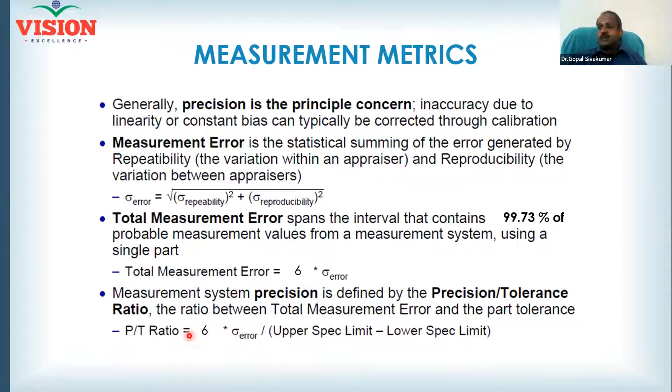This is called precision error. See here, numerator, this is called precision error. The denominator, tolerance, USL minus LSL. Now you have the ratio, precision tolerance ratio. What is the name of this ratio? Gauge R&R. Very good. So this gauge R&R should be less than 10% to consider your measurement system as good.

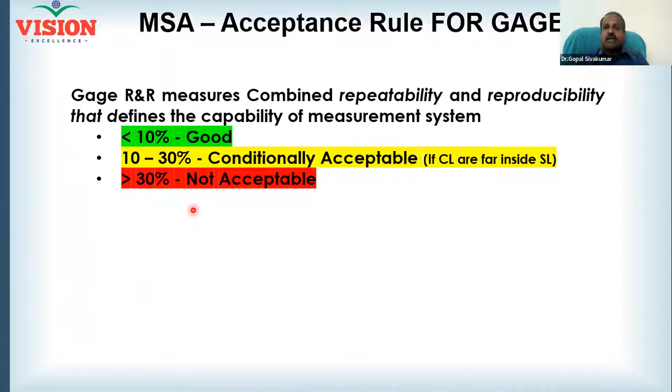10 to 30%, conditionally good. More than 30%, unacceptable. Your data is garbage. Garbage in, garbage out. Whenever you are, yes, conditionally acceptable means?

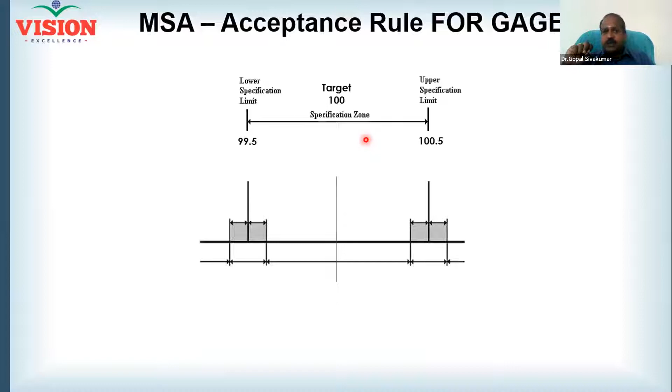0.1 mm can be error. If you have 0.1 mm error, 90% of the time you are safe. But 10% of the time you are under risk. That risk area is marked here. Can you see the gray area? When you produce here, you will commit type 1 error or type 2 error.

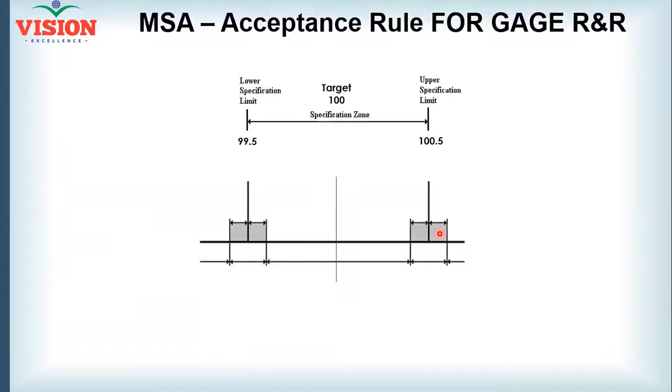When you produce here also, when you produce here, is the product good or bad? Bad, because it is out of spec. But because of the equipment error, your quality inspector will bring it here. Possible or not? Error can be plus, error can be minus. I can give you extra 5 marks, I can also reduce 5 marks, right? So error can be plus or minus.

So when you produce here, type 2 error will happen. When you produce here, type 1 error will happen. Why are these errors happening? Because you are producing in this manner. Look here, you are producing everywhere. If you are producing everywhere, you must strictly follow the industry standard.

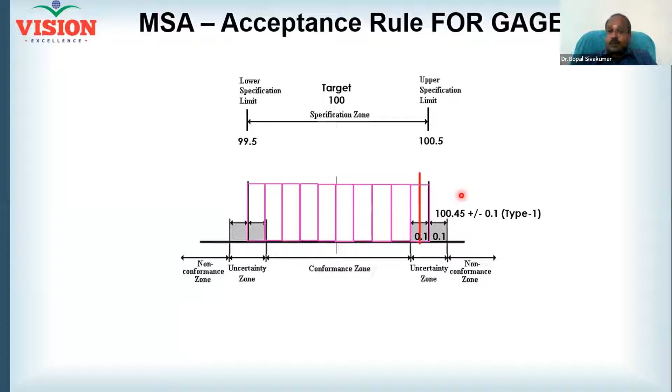Gauge R&R should be less than 10%. For you, the second condition is not applicable. You are not a world-class manufacturer. You are an ordinary manufacturer, an ordinary service provider, because you produce occupying all the tolerance. You produce occupying all the tolerance. But you are a matured company. All your people are skilled enough, so they keep on improving the process.

If they keep on improving the process, now you are able to produce in this manner. Do you understand where you are producing? Now you are slowly becoming world class. I will call you real world class if you produce everything around the center. But now you are close to world class. You are producing in this manner.

Can you see the control limit falling well inside the specification limit? Yes. If you can see your control limit falling well inside the specification limit, this 10% error does not have a chance to affect your product. Am I correct or not? Yes, this 10% error does not have a chance to affect your product because you are not coming into the risky zone at all.

This zone is called the uncertainty zone. It is like the India-Pakistan border. If you go to the border, there is very, very less chance you can come back, isn't it? So that's why we always avoid these border areas. It is well protected. Same way, you should also protect your risky zone.

If you clearly know your control limits are well inside, then you can consider using your measuring equipment even with a gauge R&R of 10 to 30%. Do all of you now understand the meaning of conditionally accepted? Yes sir. You can't understand this anywhere outside. If you have understood this, you are definitely on top of the experts in the market.

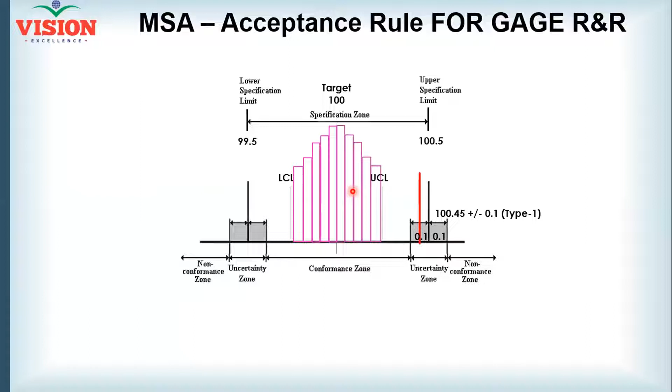Sir, conditional means it is not that we are expecting for every product. According to the company norms, we are expecting it temporarily.

That we can say. See, some companies take advantage of the statement 'conditionally acceptable.' Conditionally acceptable means my project champion is saying okay, you work with this - but these are all purely internal, there is no technical logic behind it. The technical logic I have explained. Sometimes measuring equipment is too costly. Do you think your company will immediately replace the measuring equipment? No, it is going to cost the company 45 lakhs. They'll say, no, you continue with this. See, those are not the real meaning of conditionally acceptable.

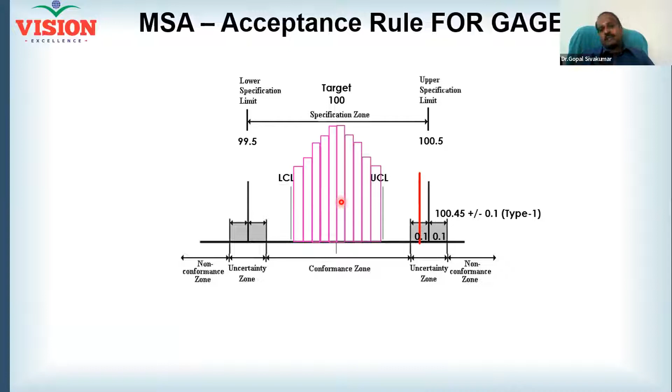Strictly speaking, statistically speaking, when the error is 10 to 30% and the control limits are well inside, even 30% error should not affect your decision. Then only it is conditionally acceptable. Only a pure statistician can understand this definition, right? Otherwise, sometimes we also say, if the company cannot afford better, accept it conditionally, but that's not the real justification. In any case, more than 30% is unacceptable. Hope it is clear to all of you.

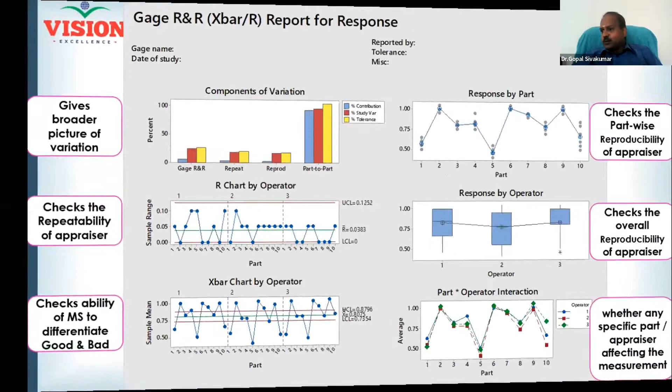Now, this report is generated by Minitab in a few seconds. But if there is a problem and you want to understand the root of the problem, you should be very good at reading all the graphs. How many graphs are you seeing here? No doubt, sir, part-to-part variation is more than 100%, isn't it, sir?

Yeah, correct. It is simply because you are working with the standard deviation - plus deviation, minus deviation, and also standard deviation. So that is why total variation can be more than 100%. If you don't want it to go beyond 100%, you must work with variance, not standard deviation. There are two approaches available. When you work with standard deviation, this won't tally. You can see repeatability error plus reproducibility error - if you sum them up, it is not equal to 27, isn't it? If you want to get 27, you square the 20, square the 18, add them, take the square root, then 27 will come.

So that is the problem with standard deviation. But we are studying everything with standard deviation, that is why I have taken the report using standard deviation. You can take the report with variance also - there, 100% will come. Total variation will become 100, and if you sum up all these things, that will tally, but not with standard deviation.

If you know how to read the graphs, you will be able to fix all the problems and arrive at a solution to bring down the gauge R&R. Now tell me, how many of you are very good at reading the graph? You might have used all these graphs, am I right? Shall we go through the graphs?

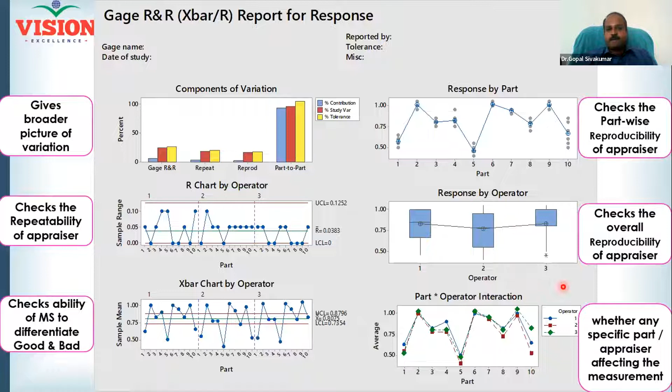Yes, shall we go through? Yes, sir. First graph, sir.

Bar graph. Now there are 3 colors: blue, red, and yellow.

The blue is for percentage contribution. When you don't know tolerance, you should use blue. What is tolerance? USL, LSL. If you know the tolerance, you must come to either red or yellow.

Now red, and there is red as well as yellow. Let me correct my statement. So there are three graphs: blue, red and yellow. Blue is with the variance, red and yellow are with the standard deviation.

So what are we working with? Standard deviation. So far as applicable is red and yellow. Within red and yellow, when USL, LSL are known, you must use yellow. If it is not known, you must use red.

Look here, the name of red is study variation. Name of yellow is tolerance. Use yellow only when USL, LSL are known. Most of the time you will be knowing the USL, LSL. Am I correct? Yes, sir.

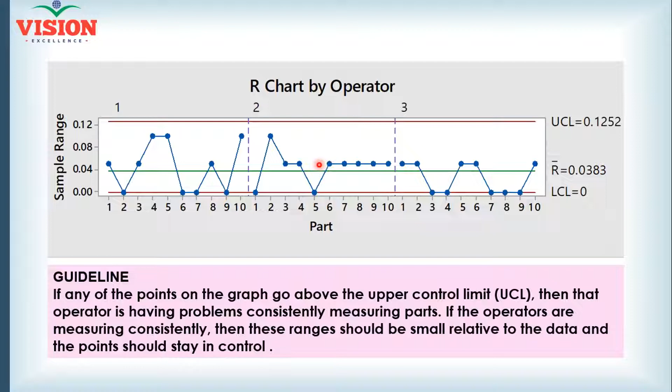2 is also okay, isn't it? But can you look at the reading of 2 here? Perfect straight line, yes sir. If you see an ECG graph becoming a perfect straight line, what does it mean? Dead, structure is over, right? So which is abnormal? If you see up and down, that is normal distribution.

You remember I told you to select 5 parts left side, 5 parts right side, am I right? But look at operator 2, he is placing everything on the upper side only. You still accept him? Yes sir, in my opinion 2 is more dangerous than number 1.

Am I correct or not? Yes sir, though his readings are too close to the center line, his readings don't resemble normality. That means he is biased for some reason. You may have to bring it down. So this is how you need to read, and make sure your reading also exhibits normality.

If your reading also exhibits normality, your reading should go up and down, isn't it? If the readings are going up and down, the person is normal, the health is normal. If it is only giving you the peak, it is abnormal, doctor's attention is immediately required. If it is a flat line, then the chapter is closed, right? So you have to be very careful with the signals you receive from the control chart.

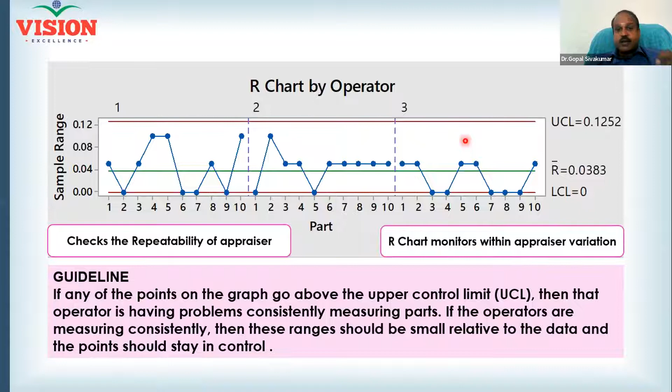And this is R chart. Now R chart helps you to control the repeatability error of the appraiser, am I right? Each single point is a range, am I right or not? If the range is under control, the repeatability error for the particular appraiser is under control, am I right or not? Yes sir.

For example, operator 1, 4th part, he committed the repeatability error too high. 5th part also he committed high. 10th part also he committed high. And operator 2 also, for part number 2, he committed more repeatability error. Do you understand? Operator wise, part wise, we are able to visualize the repeatability error. How many of you understand? All of you.

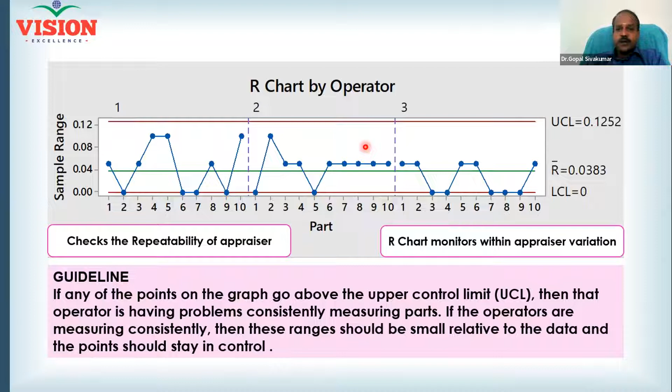Okay, sir. Understand. Yes, sir.

Now the next chart, X bar chart. This will help you visualize the reproducibility error as well as check the ability of the measurement system to categorize good and bad parts. I told you, when I give you 10 test papers, 7 should have a pass mark, 3 should have a fail mark. Now you are actually correcting the paper. How many test papers should actually pass? 7 should pass, 3 must fail.

Now, who selected the 10 parts in your Gage R&R study? The project leader, am I right? Or is it you who is conducting the gauge study? When you select the 10 parts, I told you to purposely mix in some bad parts. Am I right or not? Yes, sir.

If you mix 50% bad parts and the remaining all good, you should get all those 50% points outside the control limit. If that is not happening, please understand you are passing even a failed candidate. You mixed 50% bad parts, so bad parts should appear outside the control limit. If that is not happening, that shows the inability of your measurement system to categorize between good and bad.

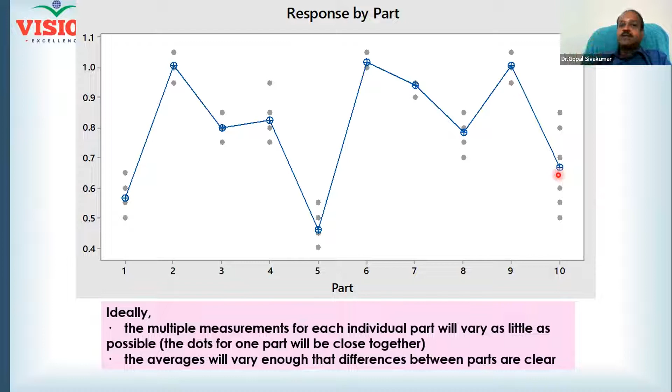All right, now the box plot. Box plot will help you control or understand the reproducibility. If there are 3 appraisers, and my average, your average, and the third person's average are all the same, you will see these averages on a perfect horizontal line. Am I right? See, this crossbar is the average. Since the averages are not on a perfect flat horizontal line, there is a reproducibility error.

Who is pulling down the average? Operator 2. Operator 2 is not aligning with 1 and 3. Operator 2's average is below the average of 1 and 3. Now another question: is operator 2 correct, or are 1 and 3 correct? 1 and 3 are correct. If 2 were correct, 1 and 3 should align with 2. If 2 is wrong, 2 must align with 1 and 3.

This also you can understand by carefully designing your Gage R&R study. If you select the 10 parts in such a way that mean equals median - do you understand one property of normal distribution is mean equal to median equal to mode? Am I correct or not? Yes. If you select the parts such that mean is equal to median, for example 5.4, 5.5, 5.6, what is the mean?

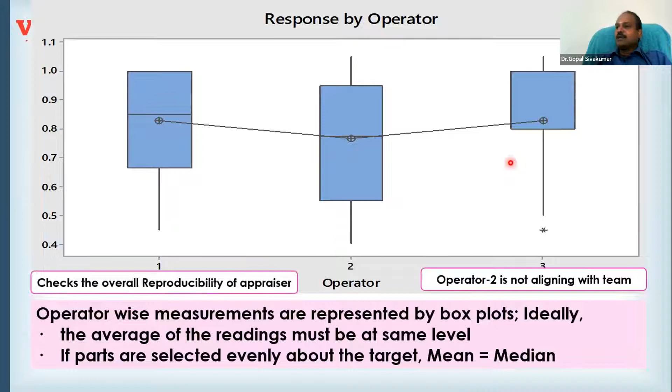And now this is called the interaction plot. It is nothing but your third graph. What is the third graph you have seen?

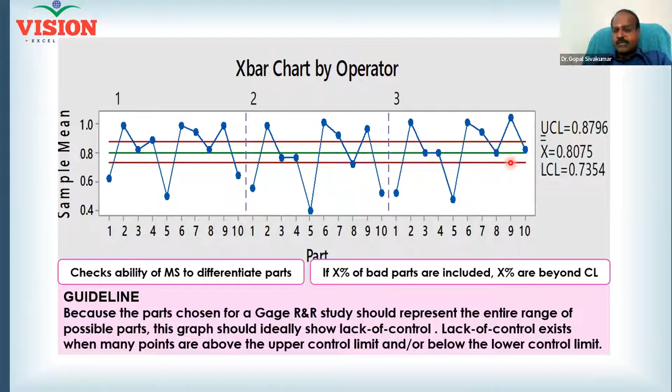What is the third graph you have seen? X bar chart, 3 X bar charts you have. If you overlap all the X bar charts one over the other, you will get something called an interaction plot. 1, 2, and 3 all are overlapped with each other.

If there is a perfect overlapping, reproducibility is at its best. Now, if it is not overlapping, at least they should be parallel to each other, not overlapping and not parallel.

Now, who is responsible? Look at the one who is crossing the line and disturbing the parallelity. There are 3 people, right? Look at the one who is not parallel and who is crossing the other one's line, and that one must be corrected.

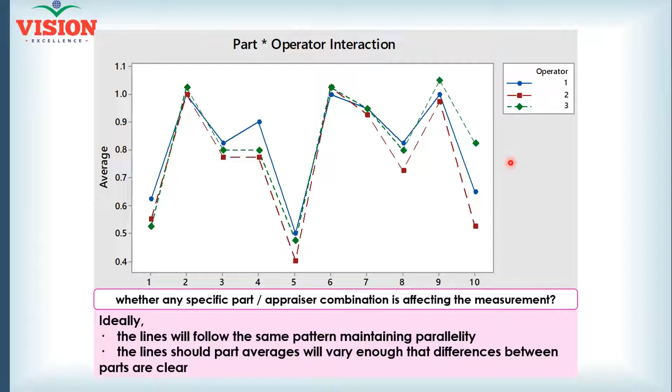Do you all understand how to read the graph? Yes sir. Here, from part 4 to 5, all are coming down, isn't it? All are coming down. And from 5 to 6, all are going up.

But you can see the green crossing with the blue, isn't it? And red also slightly crossing. So when there is an intersection of these lines, it means there is an interaction.

Their behavior is slightly abnormal, becoming abnormal, particularly while measuring part number 6. Up to 5, all the 3 behaved properly. That is why they are coming parallel.

Now something went wrong. I do not know whether the product is difficult to handle or the measuring equipment is difficult to handle. I do not know, but something wrong is happening. That is the reason for interaction, and that is the reason for intersection. And here the intersection is so strong by the blue color person.

Can you understand? So something like that you need to read and understand the situation. Particularly, you will be able to understand the graph very well if you have designed the study properly.

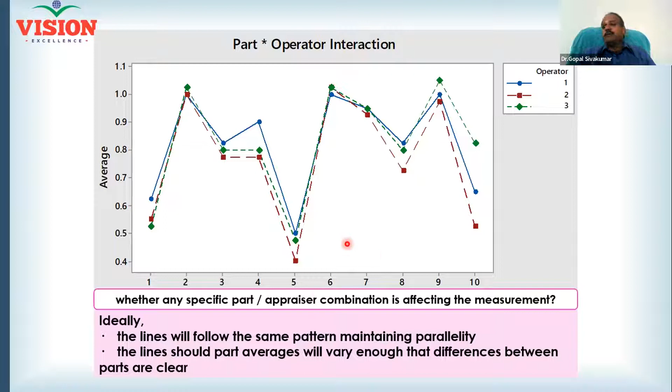This is how all of you can conduct the Gage R&R study and make your data worthy for analysis. And that's it from me.

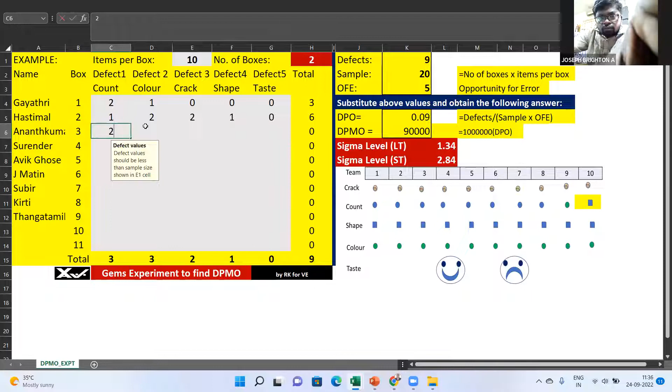Count, is there any defects? Sir, 3. Okay, I will take it as 2. Color? 1, 3. Someone is fast, please tell me. Crack? 2. And then shape? 1. Taste is 0, I'll put.

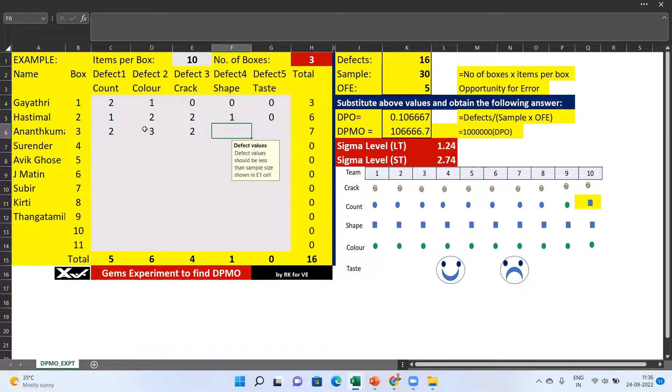Right, see here, 3 boxes are open, so it is 30. 30 into 5 is 150 in the denominator, 17 in the numerator. And that defects per opportunity is 0.113, per million it is 1,13,000, and sigma level is 1. Please note the difference between the two will always be 1.5. Now I'll just copy it.

See here, total defects found out have to be 69. You can do this calculation later on, all you need to do is check it yourself. Total is tallied here, column wise and row wise. And then sample is 70, 7 into 10 is 70. Opportunity for error is 5. 70 into 5 is 350. 69 by 350 is 0.197143.

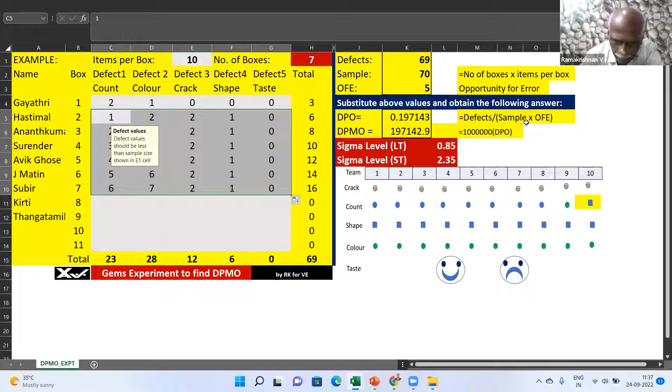This template I'm going to share with you. You can play it at leisure time in your college with your professor, probably she can arrange for this game, and then you can test it: what is the sigma level, short term and long term. Please note, what should be the sigma level for a good performance?

What is the course name? What is the course you are doing? Six Sigma. So what is the best performance? 99.99, Six Sigma. Six Sigma performance is the best performance. Yes or no? Yes, sir.

Now you are getting sigma level as 0.8, 2.35, very low. You should get sigma as 6. Yes or no? Sigma level 6 sigma we should get. So this is doing well or not doing well?

This is doing well or not doing well as per this? Not. No. But Gems is really doing well in the market, monopoly, because we have made a mistake here. RK has made a mistake. RK has made 2 mistakes.

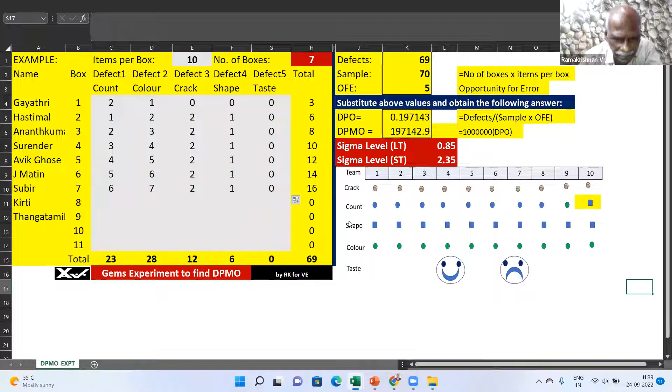Number 1, he has not taken the right sample. He should not have discussed this with you; he should have taken children, because it is meant for children. That's defect number 1, fault number 1. Understood? Yes or no? Fault number 2 RK made was that all the opportunities for error are not at all relevant for children. What is relevant for children is only taste. Therefore, if I put 0 here everywhere, then it is a very good process.

Please see here, and then you can see here.

So infinity, sigma level is very good, right? Even if I put 1 here, it will be 4.26. It is good. Therefore, you will have to do a sample study very carefully.

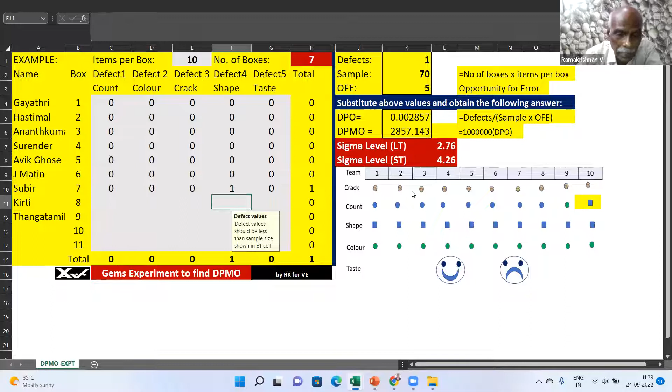Understood? I'll stop sharing here. Now I have taught you what is defects. What is defective means if all the specifications are not met, then it is called defective and it is to be rejected. A defective is to be rejected. A defect item may not be rejected. Understood?

Now I will take you to how to calculate defects, defectives, and then CP/CPK. CP/CPK is for capability analysis, and then I'll just take you to it. Another 20 minutes is there, right?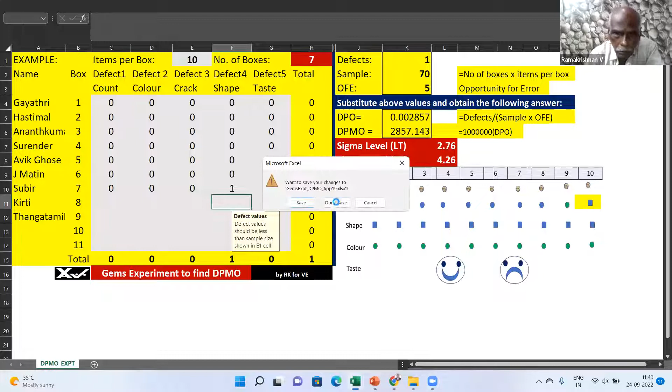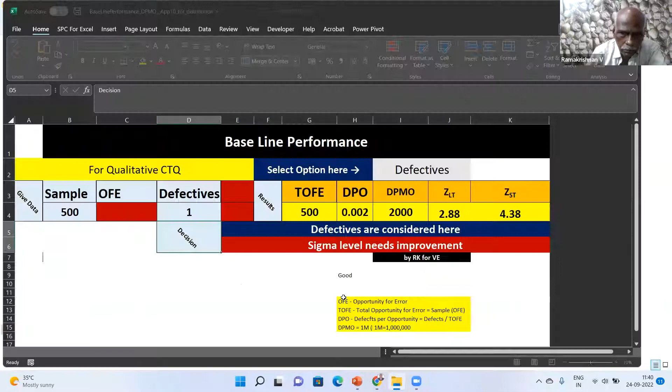See, are you able to see this? Yes, sir, this also I'm going to share with you. This template will be given to you. Please note, defects or defectives, you have to select here.

First, we'll select defectives. Defective means how many of them are rejected, that is what it means. So I have taken 500 samples. Opportunity for error is only 1. Either you reject it or accept it. That's all. Therefore, opportunity for error is always 1 for defectives.

Therefore, it is not giving an opportunity for you to feed in any value. If it is defects, this will open up for you to feed in data.

Now, suppose in 500 samples, I make it as 3 defectives. Then it is giving you short-term sigma level and long-term sigma level. DPMO is known. Total opportunity for error is 500, because 500 into 1 is 500. Defects is 3. 3 by 500 is 0.006. Multiplied by 1 million, you get 6,000. And short-term sigma level and long-term sigma level are obtained from this. Now, defectives are considered here.

Sigma level needs improvement. How much, up to 6, right? If you get 6 sigma level, then you are best.

Please note here, this is defects. This is called ZST. This is called ZLT. That means defects will increase over a longer period. That is why ZLT is low. ZLT is 1.5 less than ZST. So depending upon the green level line, the defects are diminished or increased where it is.

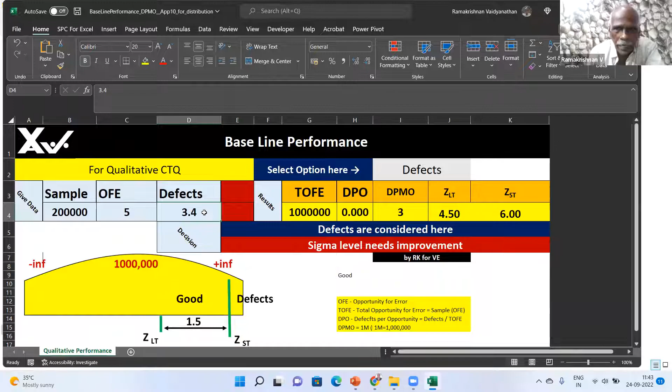Now, yes, sir, I'll just share it immediately after finishing the teaching of CP and CPK. Right? CP and CPK, there are 2 ratios which you should know.

How it is calculated, I don't have the PPT because I did not have time to select that PPT. But anyway, the PPT that I have at present, with that I will teach you. You will be able to understand that.

Oh God, oh God, oh God, oh God, oh God.

Is it CP-CPK calculation is there? Yes.

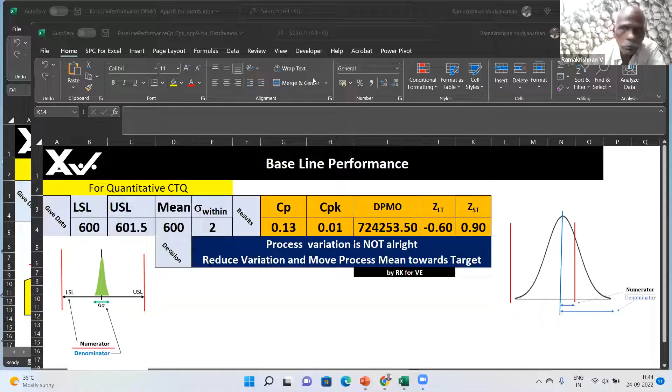I don't know how to adjust this. Yes, see here, these 2 red lines are there, no? Are you able to see this? Yes sir, see my this plus symbol. And what are they? Upper specification limit, lower specification limit, sir. Given by whom? Customer, that's all. And that is in the numerator, that is given in the numerator. And what is this green area?

Accepted, that is your process. Okay, that is your process. What are the process limits? 6 sigma limits are there. Yes or no? Yes, sir. So what is the process giving? What is your requirement? Now this is in the denominator. And the numerator by denominator is called CP. Right? Understood?

Here CP is different, yes or no? Is this a good performance? This one, right hand side. Right hand side is not a good performance. Here it is a good performance. Yes or no? Yes sir. How to calculate the CP and CPK?

CPK means, suppose this green area - I'm sorry, I'm not able to do this thing, otherwise I'll show it in the PPT. This green area, if it is shifted towards the right and close to the red line, is it a good process? No, sir. Even though this CP is very good, this process is not very good. That is given by this CPK. What is this CPK? CPK is the difference between the process specification capability limit and the mean of the process.

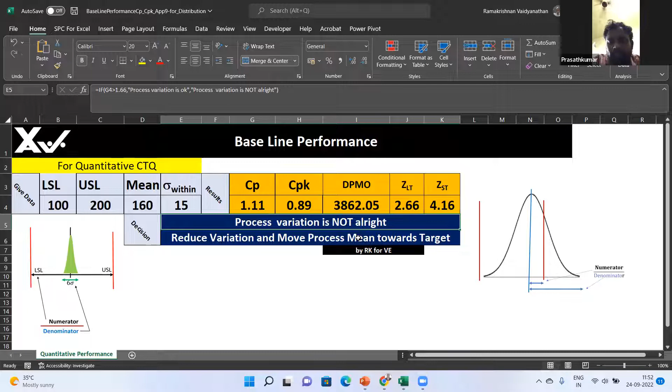Now with this template also I'm going to share it with you. You can use it and think. And then I will take you to a PPT and take you through more class. Now I'll have to stop sharing. How do I stop sharing?

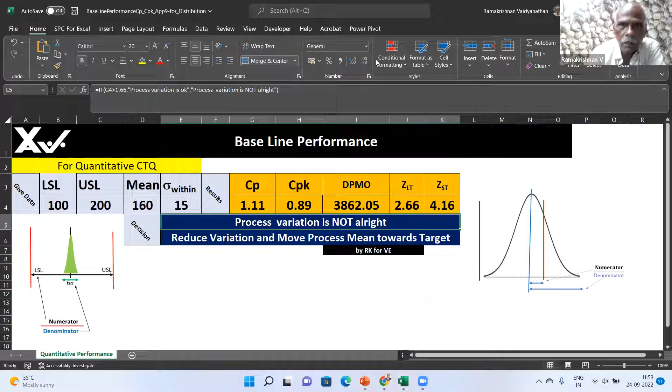Please. Where is... web? RK sir. Yes ma'am, 12 o'clock, yes, 12 o'clock Ravi will join. I finished. Sir, you want the template or not? Yeah, please post it in the chat window now. I don't know, where was it?

Okay, so baseline performance. CPK.